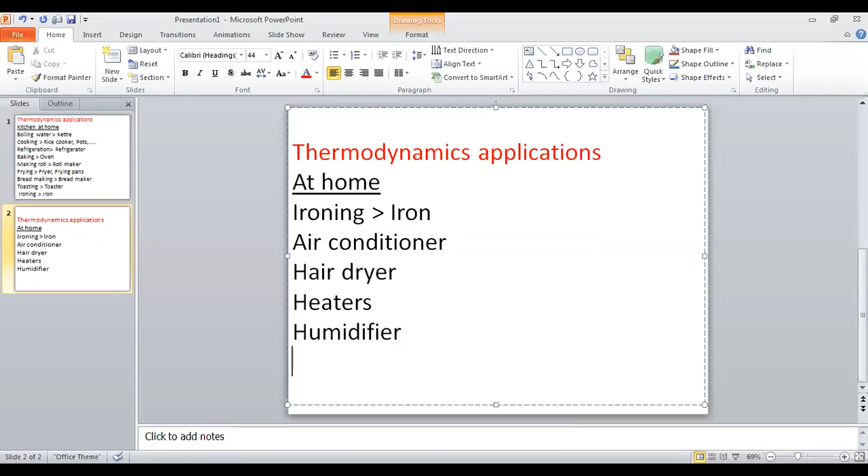If some have valuable artifacts, they keep humidifiers, or some may need to remove the humidity with a dehumidifier. Those can be in houses, but we don't have many because we don't produce them locally.

At least you are going to see hair dryers, heaters, humidifiers. Even in your phone you can see heat generation when you are using it, because digital electronics have processes taking place. Your gadgets, phone, computer, all need cooling. Even your computer's microprocessors have cooling solutions.

Even your LED bulb, CFL bulb, or the normal incandescent bulb generate heat that somehow has to be dissipated. In bulb design, heat transfer is considered very important alongside thermodynamics, and both of these, thermodynamics and heat transfer applications, go together. No heat transfer, no thermodynamics.

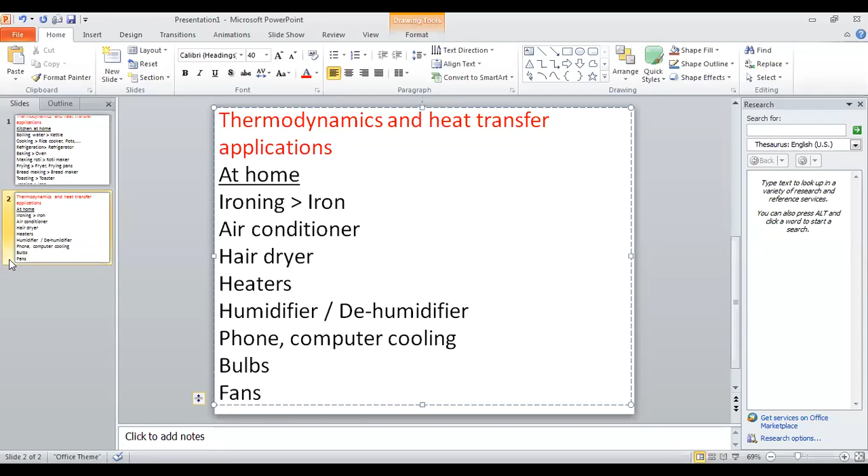Let me duplicate this at home. Let's say even home design - eco solutions, eco designs, natural cooling, designing of glasses, windows, or location of windows and all for natural cooling, then energy efficient eco solutions. So in home designs, eco solutions, designing of windows, the orientation of the house and all - this also needs thermodynamics and heat transfer, natural knowledge.

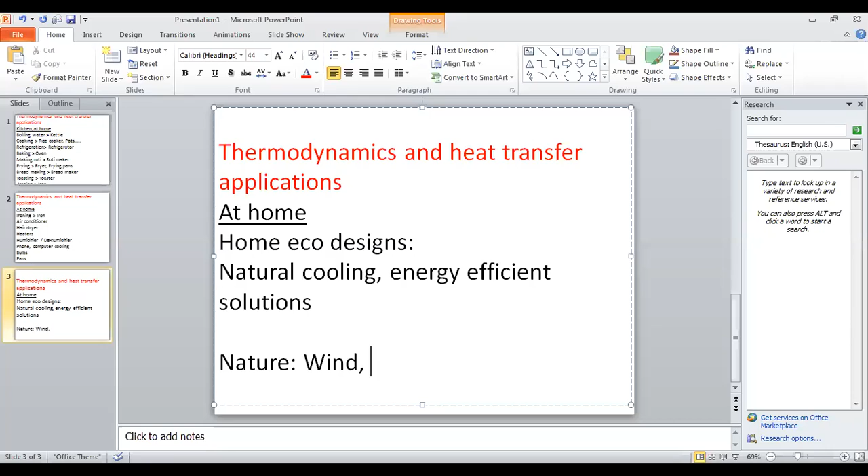Now you can see how important this is. Also other than this, even nature - wind, modeling of wind, the weather - all these things are related to thermodynamics.

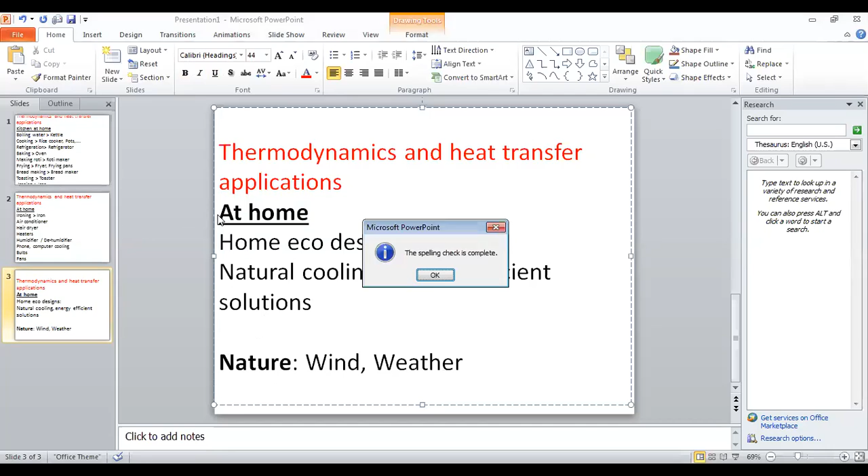Very important. If your natural knowledge is not there with you, do you think you will be smarter without the knowledge of thermodynamics? No, you will not be smarter. It doesn't mean that knowing only thermodynamics makes you smarter, no such thing. But without it, having this thermal scientific knowledge is a necessity. Natural understanding is very essential for everyone, and this is very important for technology students. So today we are discussing the importance.

So your knowledge contributes to home eco designs. You are developing some components, parts - for example, special window designs, louvers, and also natural cooling effects in houses, energy efficient solutions - everything you have to deal with.

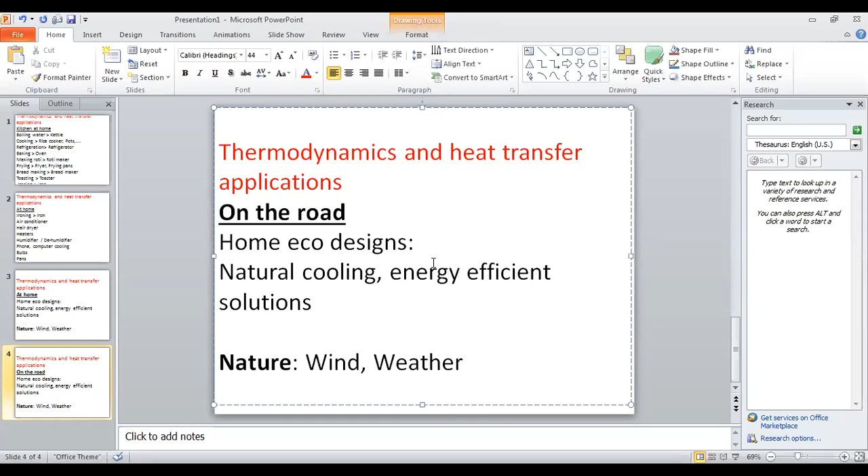Let me continue this. On the road - even when you are running on the road, you will be consuming energy, your body will warm up, and there are some kind of energy interactions. So any science closer to studying this physical exercising or running is thermodynamics and heat transfer. Even simulating blood flows and all, you need thermodynamics, heat transfer, and of course fluid mechanics, and a lot of thermofluid things.

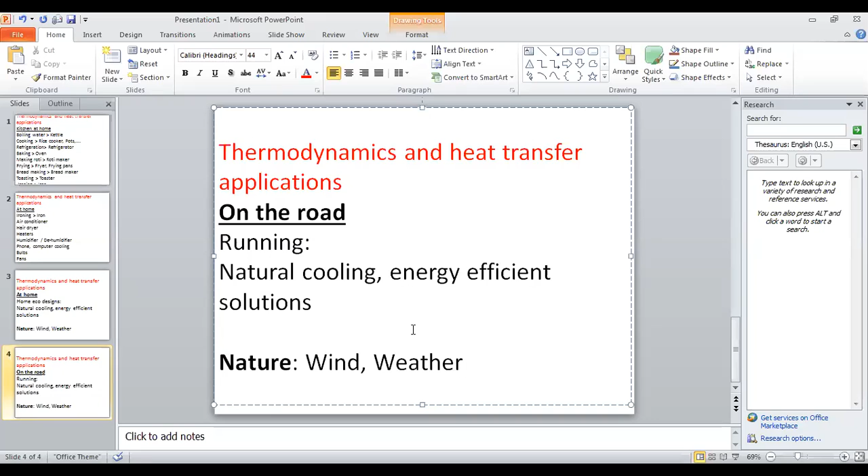Running - how about the motorbike? Everything, including the engine power, engine cooling, even the safety of the petrol tank, the controls, acceleration, and all the controls of the movements are mostly related to thermodynamics.

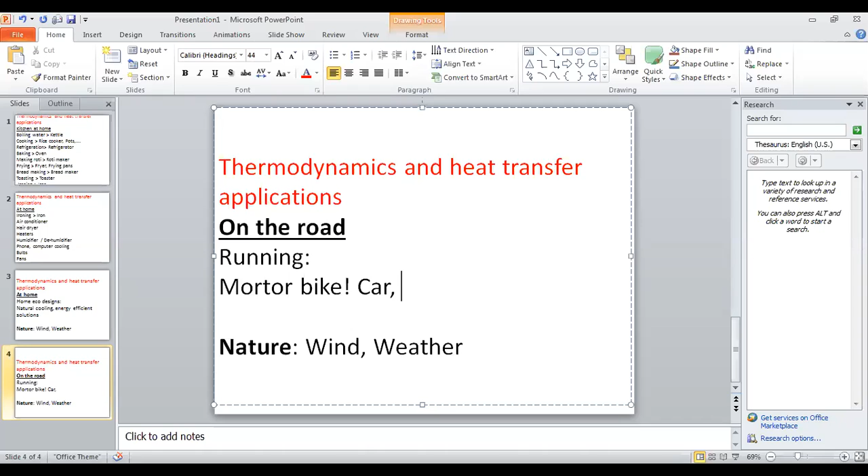Your car, if you have a car - inside comfort, car air conditioning and climate control inside. Then the vehicle running, the engine dynamics, engine cooling, engine reliability - whatever is related to automobile is related to thermodynamics. Without thermodynamics, you cannot develop this.

Let's say Ferrari - Ferrari is a supercar. So they design and develop this not based on theory, but based on experience. That's why if you can do wonderful creations, it is something beyond the books. Sometimes book knowledge is not necessary, but your natural wisdom in understanding thermodynamics without equations is what matters. Ferrari, I just put here.

Then friction control - friction generates heat, and when friction generates heat, that can cause damage; that's one thing. And the other thing is it causes extra energy wastage and all. Friction controls.

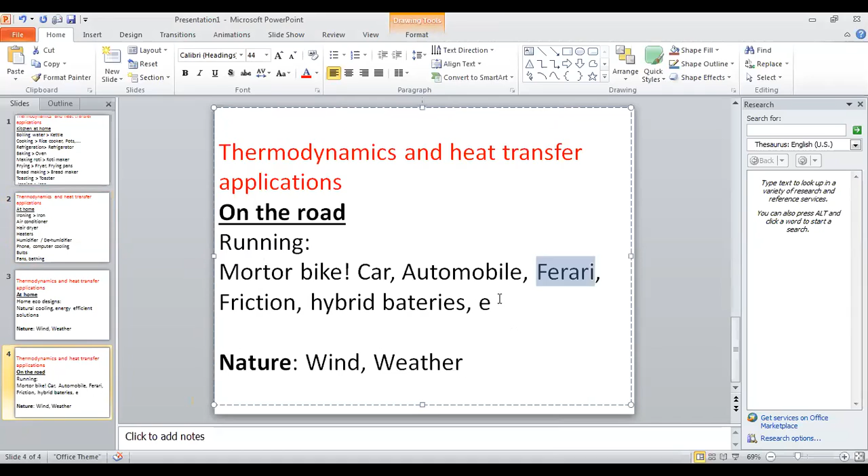Okay, hybrid batteries. On the road, okay, everything. Even emissions - you have the very toxic emissions. So emissions, not to say emissions, but control. This needs some careful controlled combustion and also use of quality fuels, your piston cylinder ignition system, and everything. So that's why it's related to environment as well. So emissions control in vehicles.

Emissions. Emissions means there are a lot of things you have to learn, okay? Emissions, exhaust control, emissions control in vehicles - lot of things. The thermodynamics aspects are the fullest, okay?

On the road, okay. So when it comes to energy, let's say before talking about anything, without understanding of thermodynamics, how can you contribute for this? Not possible, okay, not possible. Your understanding should be very important. That's why your understanding - not the understanding of the textbook - how to relate your knowledge to the applications, how to develop the solutions, that is your goal of learning thermodynamics.

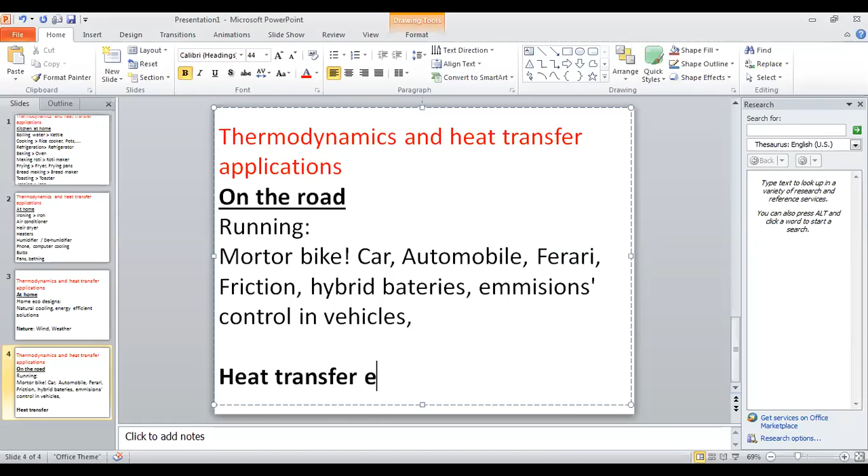Okay, thermodynamics. And you know that there are professions. We have the heat transfer - there are engineers, and there are technologists. Do you know that they are very expensive and very rare? Yes, heat transfer engineers are there. Heat transfer technologists are there.

So they can see what the others can't see. They can see through the nature, so they can understand the nature very well. And they are providing solutions in very innovative ways, and those solutions are really useful to the societies. So why not you can be a heat transfer technologist?

Here are the professions - heat transfer engineers in the petroleum industries, even in the chemical industries, even in automobile industries, even in appliance industry, the kitchen appliances and all I mentioned, and even in nuclear industry, even in nuclear power plants, even in coal power plants, you can see heat transfer engineers. But if those engineers working in coal power plants are not heat transfer engineers, they cannot run the show. That's the issue - every time they break down. So the maintenance, the preventive maintenance, some design improvements are not there because those engineers are not sound in heat transfer and thermodynamics.

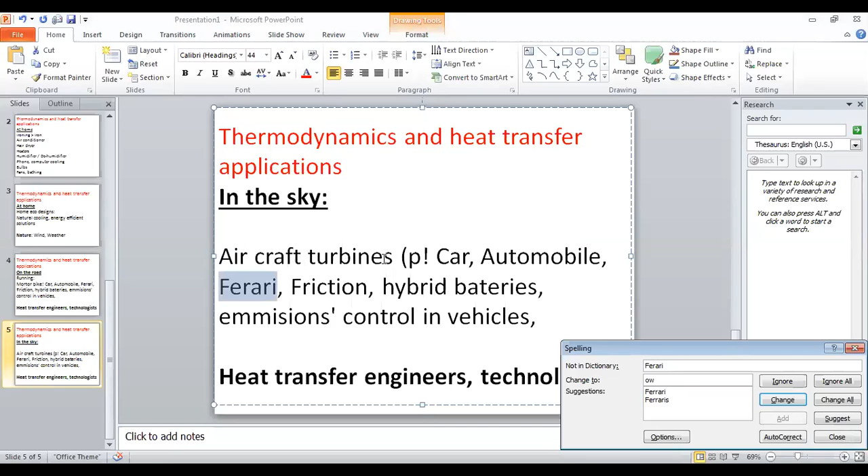In the air, okay, in the air, or in the sky, okay, sky. Aircraft turbines. Turbines. They call this power plants, okay.

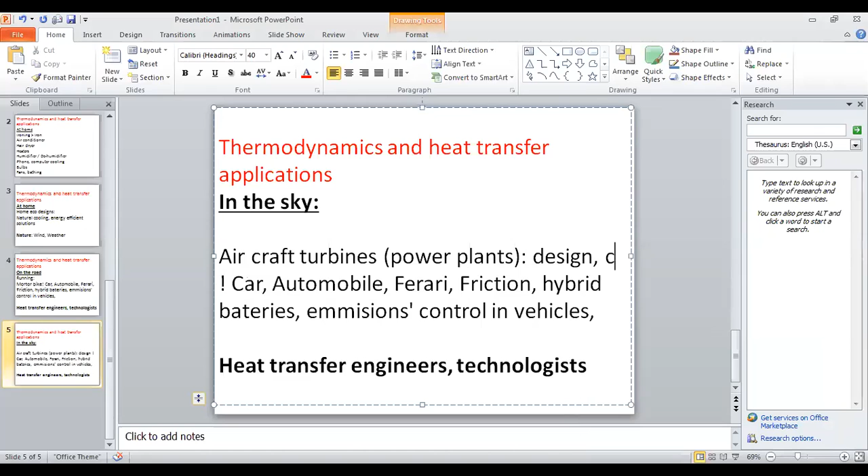Power plants in aircrafts, okay, power plants. It's thermodynamics, aircraft turbines, power plants, even design, construction. Those should be very reliable. You know, this flying is not a joke - construction, testing, maintenance, all very serious jobs, you know, all very serious jobs.

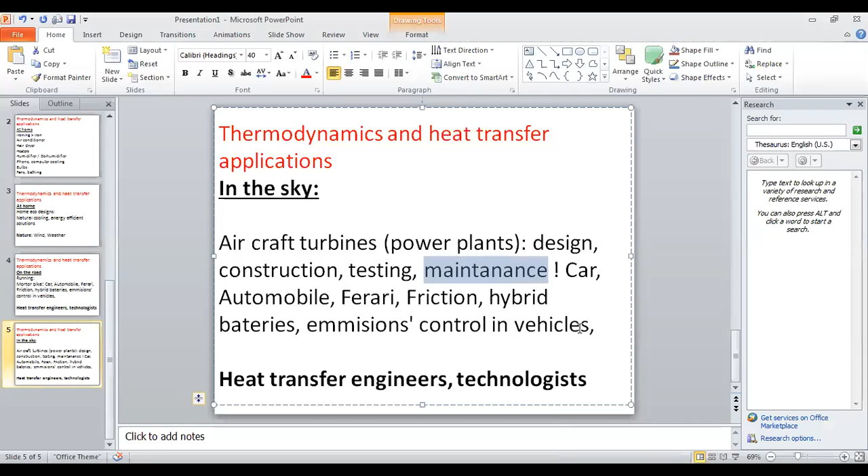Aircraft turbines - yeah, that is only one part. And in the aircrafts, there are air ventilation systems. Okay, today I'm telling you, I'm showing you how important this thermodynamics and heat transfer knowledge is.

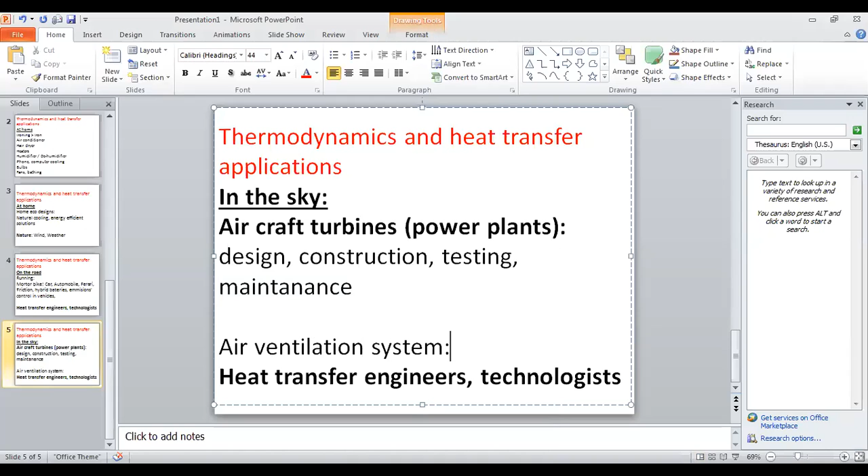Okay, later we will see in the internet the real ones. Air ventilation systems - that is not only the aircraft air conditioning, okay. Not only this, even heating the outer body of the aircraft, okay, heating the wings, heating the wings and the body of the aircraft.

So these are, because if there's no heating of the body of the aircraft, what happens? Do you know ice cream popsicle? In the middle you got one wood stick and then surrounding ice. Same way, if the aircraft is not heated outside, because up in the sky temperature is over -60, below -60 Celsius, once you come down your aircraft will be something like a popsicle.

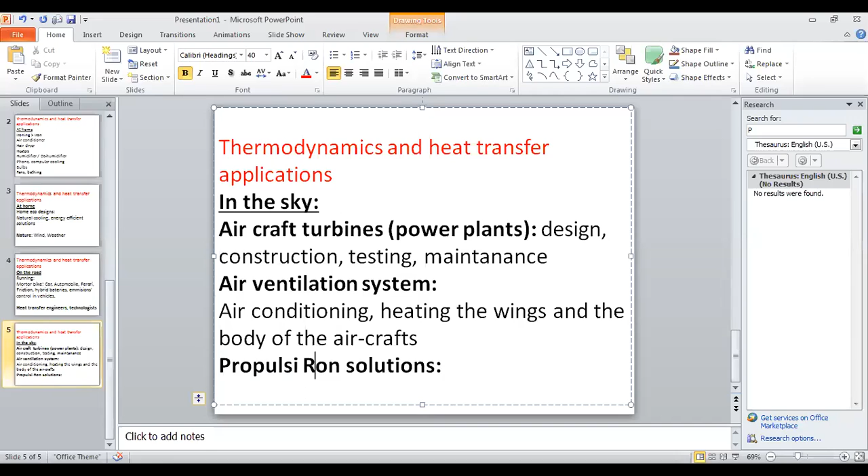Rockets, the propulsion solutions. Propulsion solutions. Rockets, rocket engines, jet engines, even the turbines, all propulsion solutions. Rockets. Jets.

Okay, then the turbines, I put again here - turbines. Sometimes you can see big propellers, it's like fans, propellers.

Later I'm going to share these things: propulsion solutions for Sri Lanka and aircrafts in Sri Lanka. Even maintenance, testing, designs, future designs for power generation or whatever - who's going to do it? Of course, you are going to do it. So that's why this knowledge is extremely valuable, something beyond the books. You have to gain the book knowledge and move beyond it, and be practical. Some knowledge is not in the books.

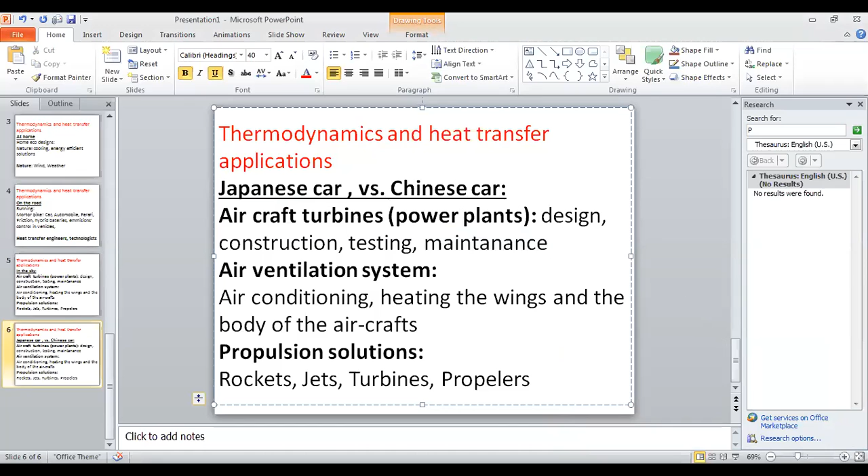How can you comment on this? What can you comment on - Japanese car engines versus Chinese car engines? You know that Japanese engines are quite good in fuel saving. The technology looks similar in appearance, but in actual performance you see a difference - an enormous difference, a big difference. Why? Similar in appearance, but a big difference means Japanese cars are better when it comes to engines and everything. What makes it this way - similar in appearance, but big difference?

Tell me why. This knowledge of thermodynamics is not in the books, and difficult to see and difficult to realize.

Can you understand? That knowledge of thermodynamics regarding vehicles, what the Japanese have, is not in the books and difficult to realize. Even the Chinese may be copying the Japanese, but it's impossible to copy everything. If you need to become somebody knowledgeable in thermodynamics, you should understand beyond the books. This knowledge may not be in the style you see in books - that knowledge may be your own, the way you experience it, the way you see it. Somehow it works, that's it.

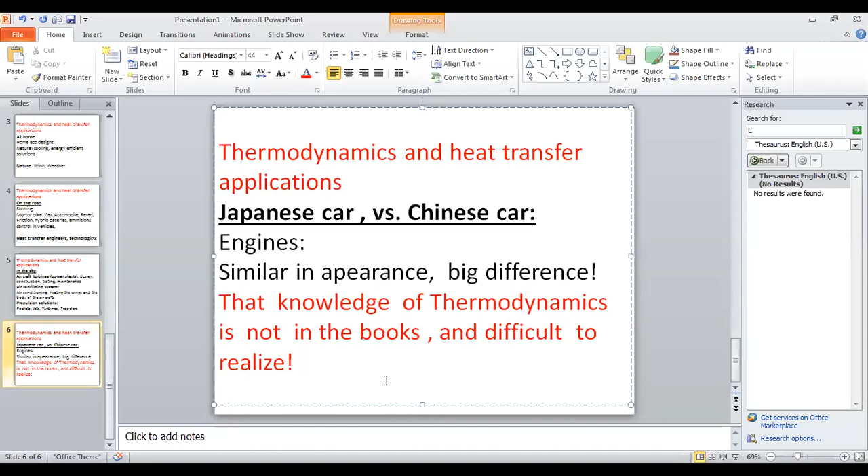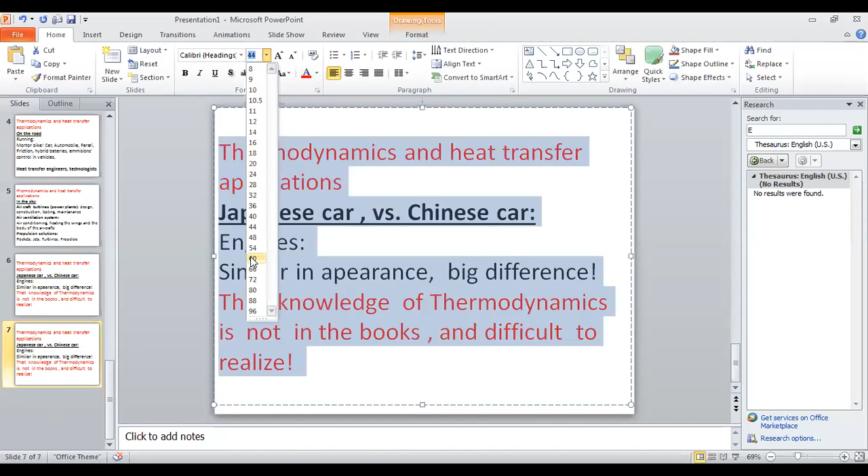This saying is really true. It's a Chinese saying: when the student is ready, the teacher appears. That's what it says. So where is the teacher? The teacher is within you. So this is a fact.

It's not just people in the world like Einstein. Many people in the world, even Sri Lankans, have received the knowledge, sometimes in unbelievable ways, sometimes suddenly they receive the knowledge - Einstein and all. Even you are receiving the same, that's the potential.

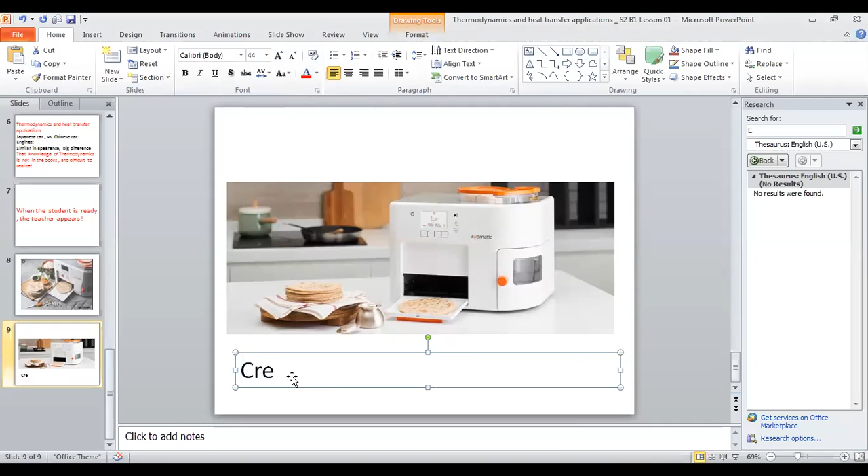Okay, creativity and innovation is extremely important. Creativity and innovation. So when you have this potential - creativity and innovation - this is what is involved.

So for this one, you have to improve your potential. Okay, your potential for this - creativity and innovation, let's see - potential. This is what is most important.

The one who has this potential generally and simply knows thermodynamics. Okay, creativity and innovation potential is very important. This is a very simple example, roti making. Yeah, so innovate this. That's why even in the world they do this kind of things. Yeah, nowadays you can see a lot of other inventions as well - yeah, simple ones. Yeah, example. So why not, you can develop your own one.

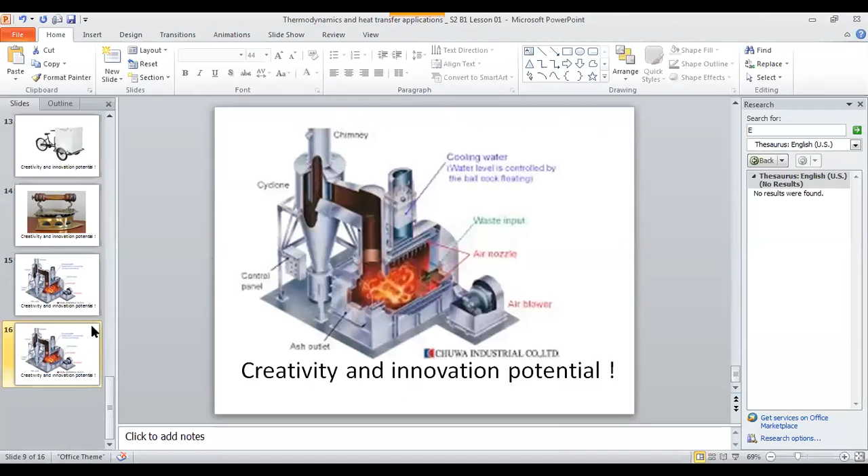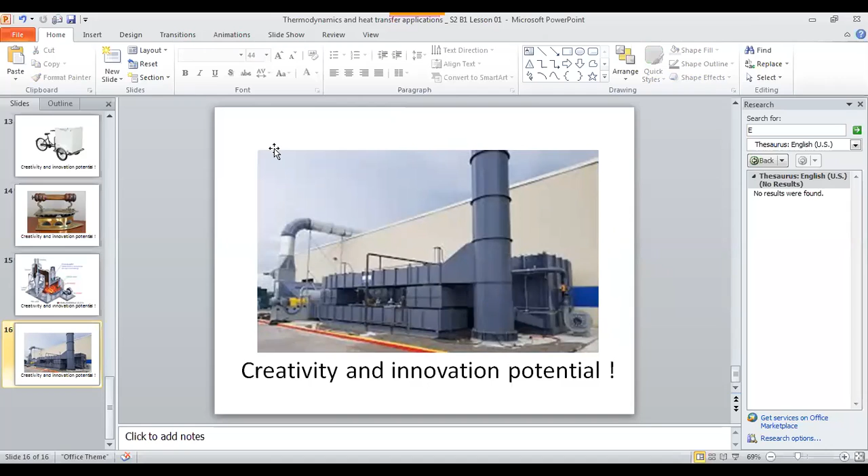Let me show you. This is for the environmental technology solution. This is a huge one, a regenerative thermal oxidizer. So this is for the environmental controls, the protections. They are using this in printing industries, some painting industries, refineries. You can see this kind of big solutions. All are thermodynamics, the industrial applications.

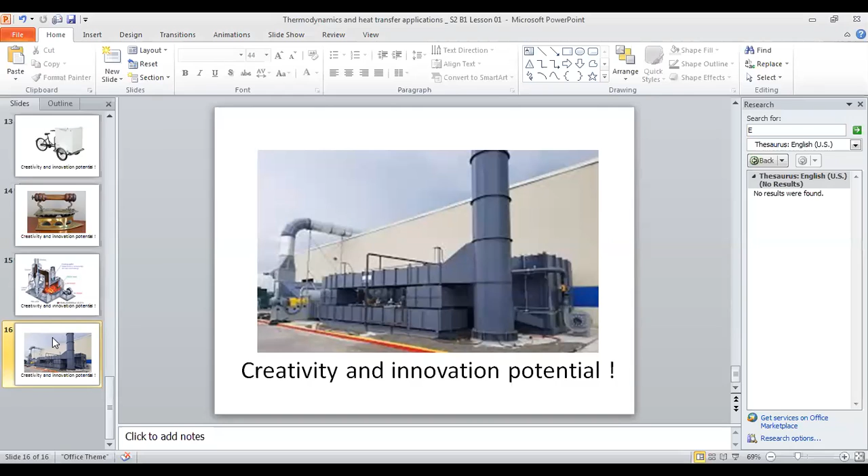Thermodynamics, so you can see how wonderful, how valuable this is. Even power generation, don't think power generation is only electrical, no such thing. Power generation is, let's say, the thermal power generation, thermal power plant. You can see huge thermal power plants. Only the electrical part is the generator, that's all, other things are all thermodynamics. That's why even for mechatronics students, the knowledge about thermodynamics is extremely important. You can see you are going to apply automation on this kind of applications, these thermal power plants.

So why not, we have to develop our own solutions. We have to start our own solutions for the society. This is our target, because if you are developing your own solution for the society, there is a demand. When there is a demand, there is a market. And when there is a market, you are more than surviving. You can create jobs for others, run industries, run enterprises, run businesses and all. It's very nice. Also let me share with you the other areas in thermodynamics.

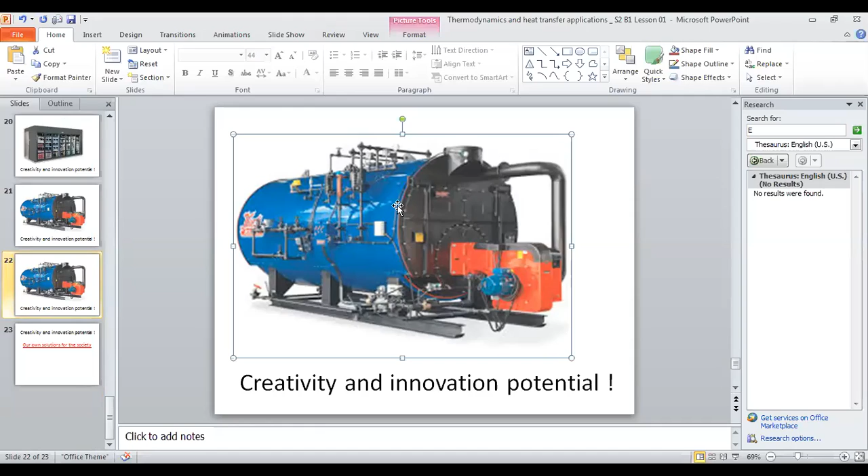These should be your interests. Remember earlier days and even now - from there you can learn the basic phenomena. What's the reason for this? We need burners as well, all related to thermodynamics.

Now, with all these elaborations, you are seeing the opportunities - not the issues, but the opportunities. And remember, knowledge brings the opportunities - the true knowledge, not just book knowledge.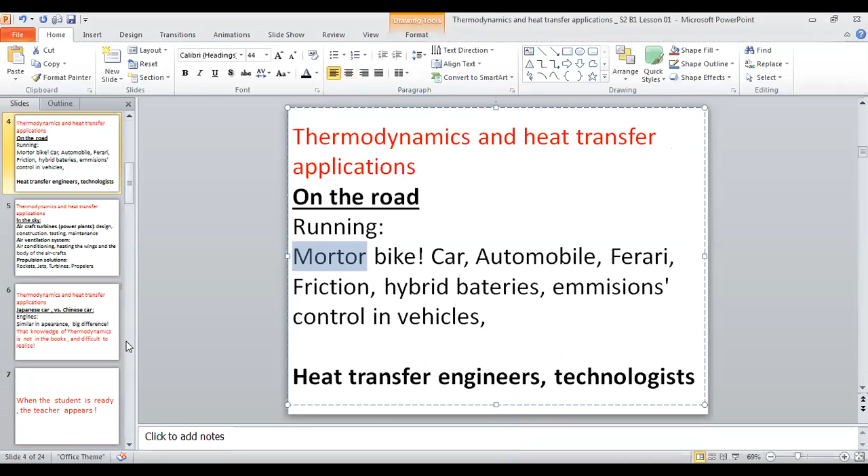So always simple, simple, always simple, always known. And it is easy means step at a time. Step at a time. So this is the approach. So this should be your approach as well in learning, because this is for you. A step at a time. Easy means that one, step at a time, easy means. A step at a time. Okay, so this is our approach, a step at a time.

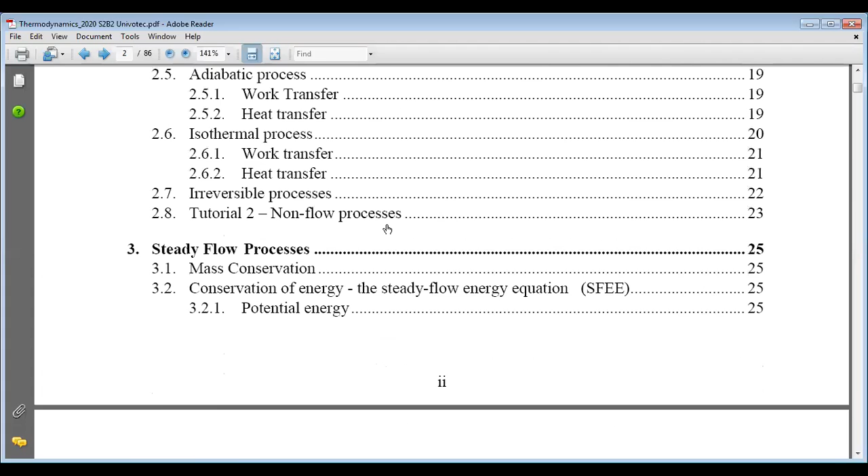Understand? Yeah, that is very important, this way. So if you open up the notes now, let me also open up the notes for you now. Okay. This is your complete note. You have to go through this, the chapter 1. You have to go through this chapter 1.

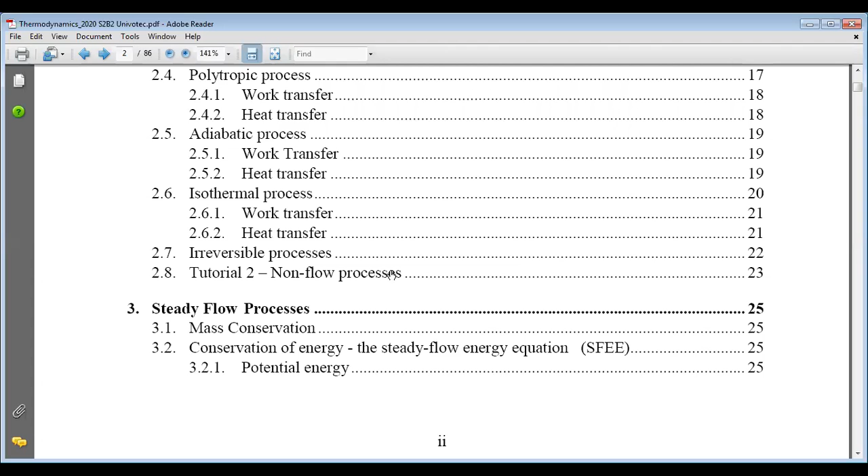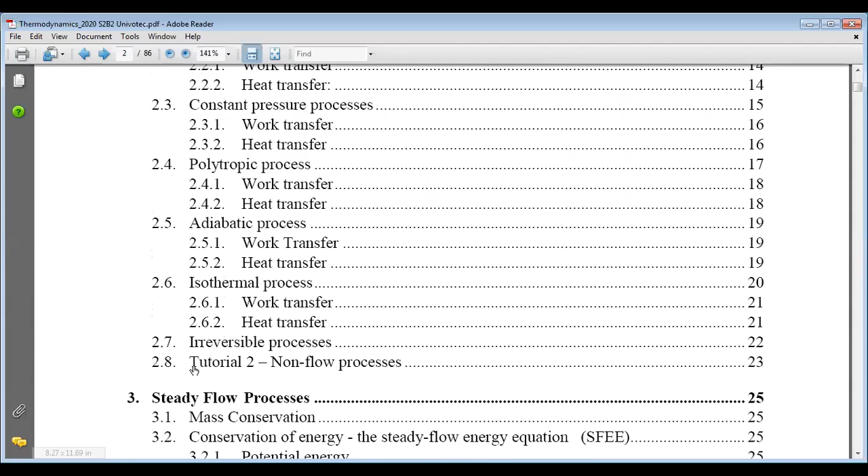Those are in the syllabus as well. Then you have to understand chapter 1, 13 pages. Then you have to go to chapter 2, okay? And you have to learn chapter 3. Chapter 3, there are 3.1, 3.2, and so on, 4 sections. In chapter 2, there are, including the tutorials, 8 sections you see. Chapter 3 is 4 sections, including tutorial about the steady flow energy equations.

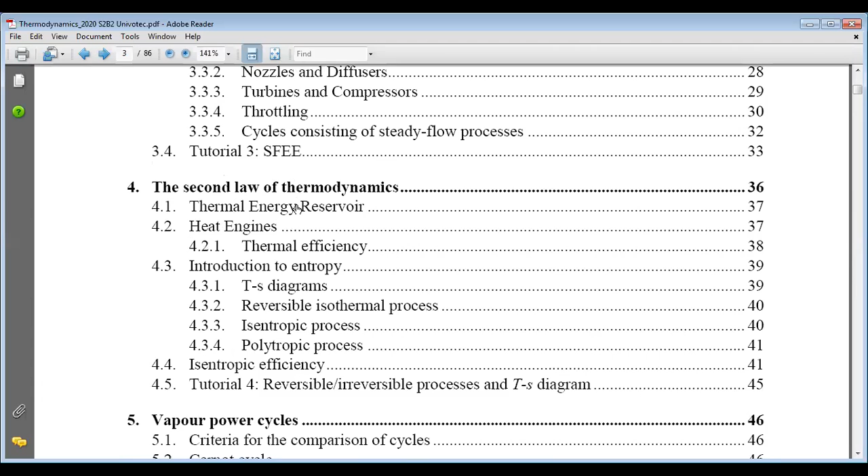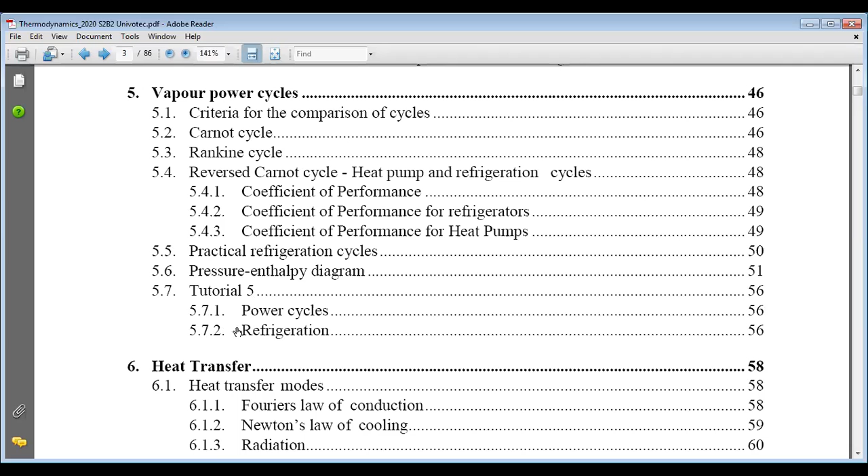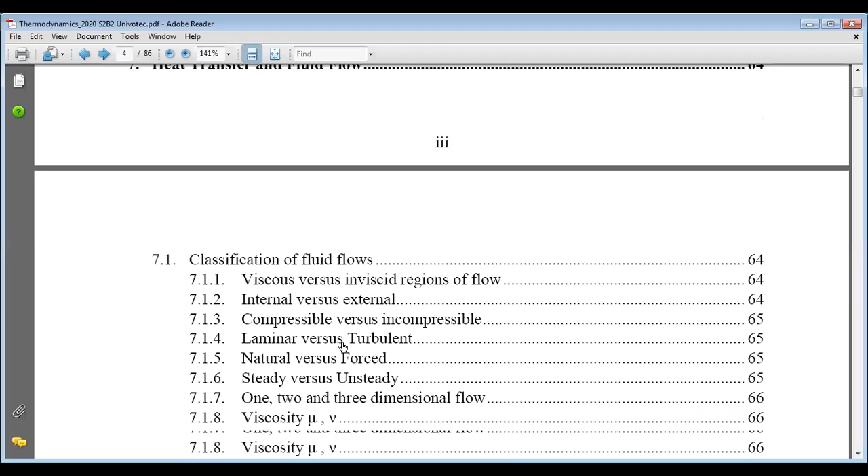Chapter 4 is quite practical again, that's about the second law of thermodynamics. And chapter 5 is about the vapor power cycles. Okay. And 572, you can see page 56, you learn something about refrigeration as well. Okay. And we will see, if we have time, we will continue this, but somehow in applied thermodynamics, you will explore more. Okay. You will explore more.

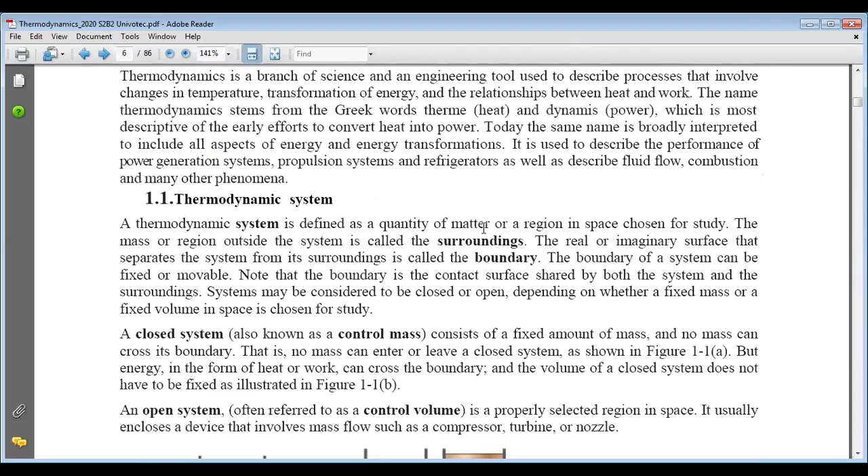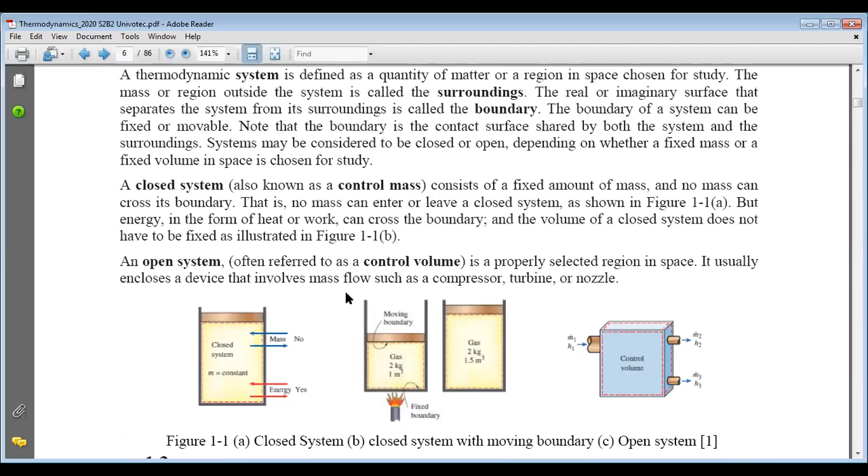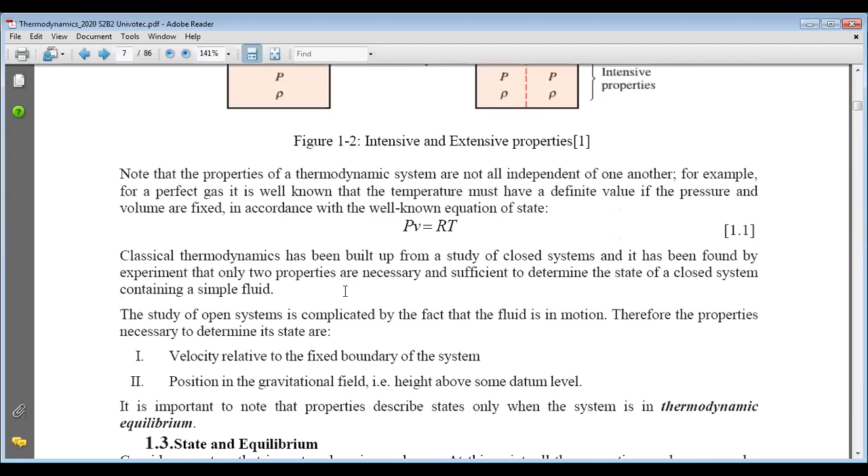So what you need to do is, I'm not 100% going to read this for you in the class. So you go through this in general, you go through it. Try to understand this. Okay? Try to give some practical meanings to this, each and every sentence. Okay? Try to give some practical meaning. Try to understand this. So if you do some careful, very thoughtful receiving of knowledge through this, it will be step by step.

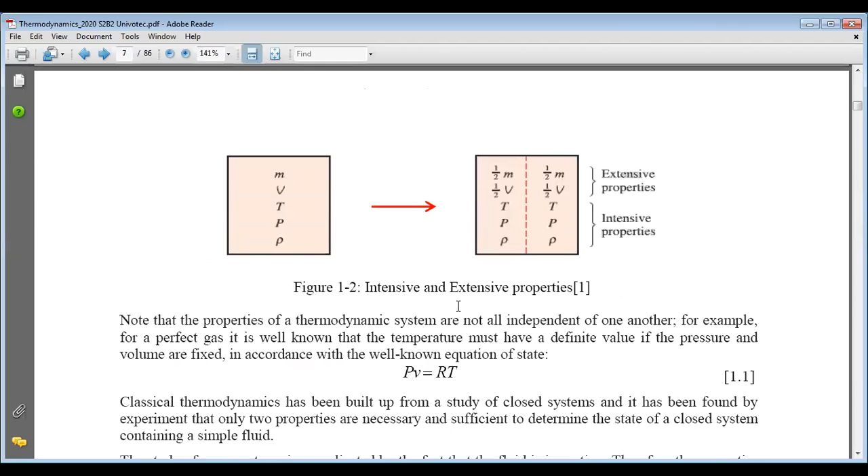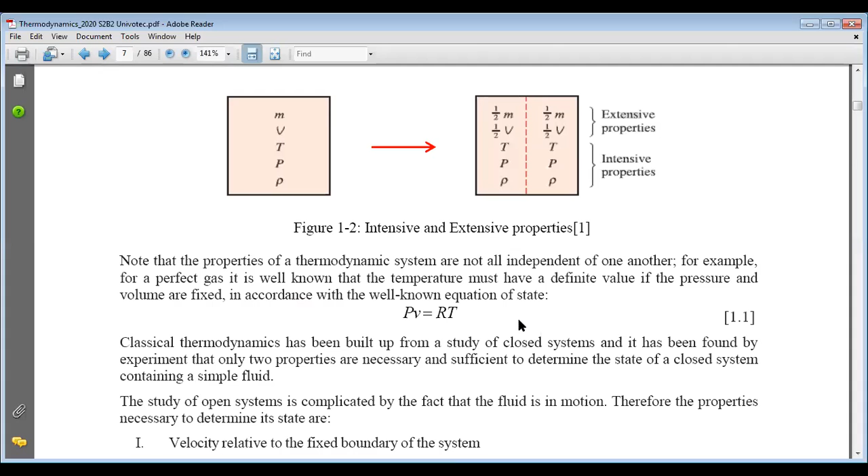Still, it will be simple to complex. That is, of course, nothing complex, because step by step, starting from simple, always simple. And it is always easy. You are learning from known things. You can explore the knowledge, so there won't be any unknowns for you.

So today is starting. I'm going to share some little important things that are not in the books. In Asia, of course, in Japan and China, they are learning these things, but we are not learning these things. So that's why I'm thinking of sharing this one. Probably important for you.

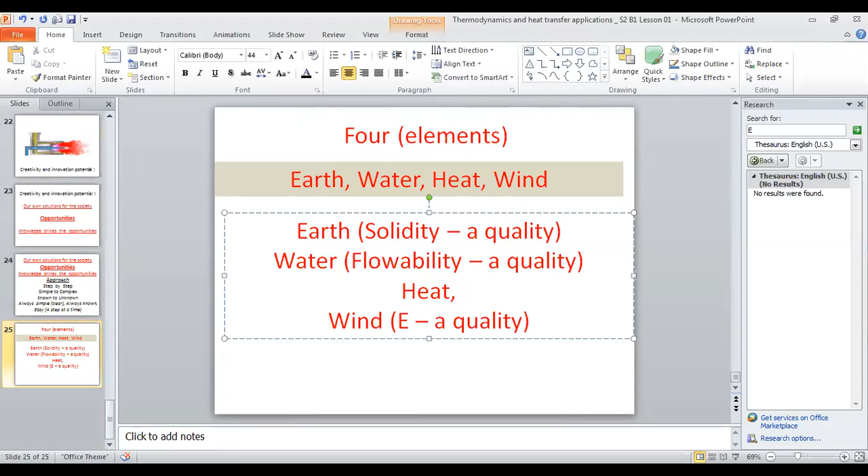Then the heat - before heat, let me explain the wind. Wind means inside our body we feel the wind. Wind means we call it expansion. The simple word is pimbino, which means expansion.

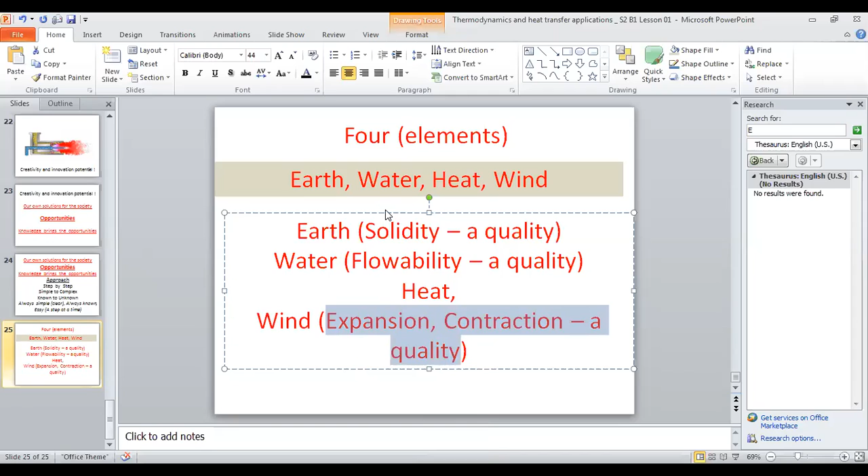And contraction - aquilino. Contraction. Again a quality - expansion, contraction, again a quality.

Earth is solidity - I'm going to prove this. Flowability is what we call water - not just drinking water, but anything that flows. Heat means we call the hot and cold - that is the heat, the energy component. Hot and cold is again a quality, that's the energy component.

Very interesting, I'm going to discuss this. Very simple - let's say air. Air, in the wind, blows because of pressure differences. High pressure means somewhere it contracts, low pressure means somewhere expands - you can see expansion and contraction in the wind even in nature. Even in breathing, when you breathe in, the lungs expand. When you breathe out, lungs contract. So when the lungs expand, air goes in - that's the normal way. When the lungs contract, air goes out - we call it breathe out. So breathing in and out happens because of the lungs' expansion and contraction - we call it the wind quality. So I will take one by one, starting with wind.

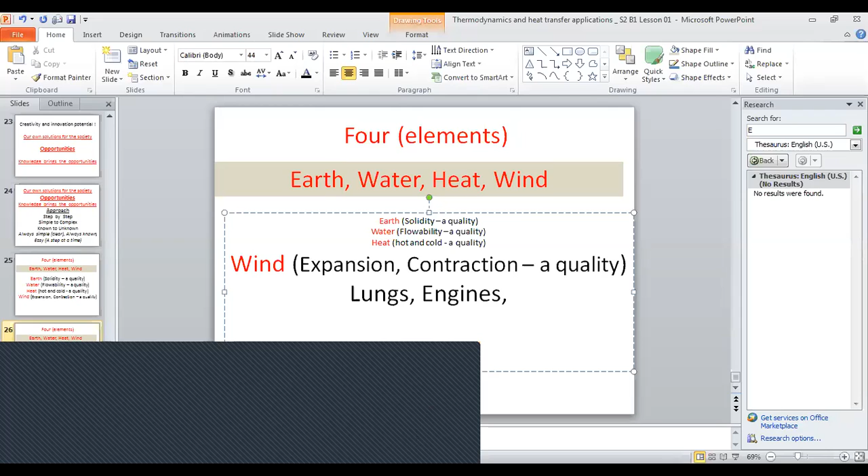Lungs, engines, even wind in weather, nature, wind expands. Even heartbeat and pulse, because of that, somehow the expansion and contraction. So even pumping tire with air, air pumping to tire, pumping to tire, into tire.

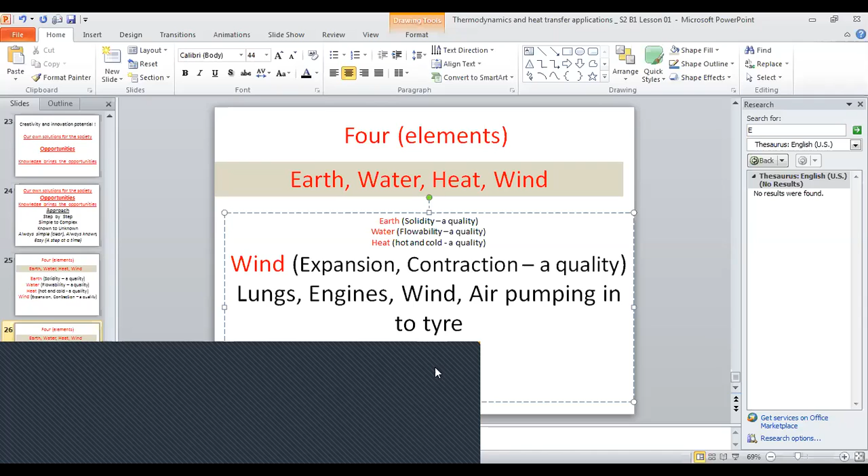This is a very important example: air pumping into tire. TYRE, I think the spelling should be okay. So what happens is, when air pumps into the tire, somehow you can see it's related to expansion and contraction. Let's say after this, the tire becomes... yeah, later I will discuss that.

There can be a lot of examples, even cooking, water boiling, you see inside, once energized, you can see some expansion, the noise, and even escaping molecules or escaping water as steam. So there you will see this expansion and contraction. Even within hot and cold, you see expansion and contraction.

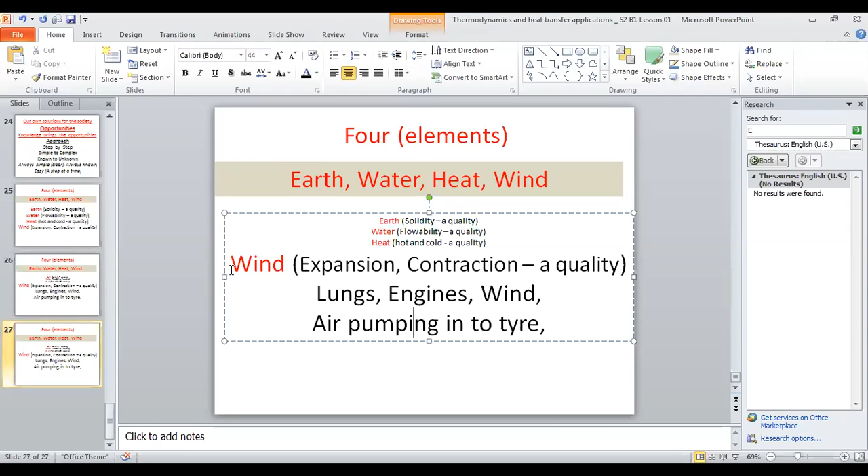So this is up to you to think. Now, let me look into not the wind, but now I will look into water. Now I will look into water.

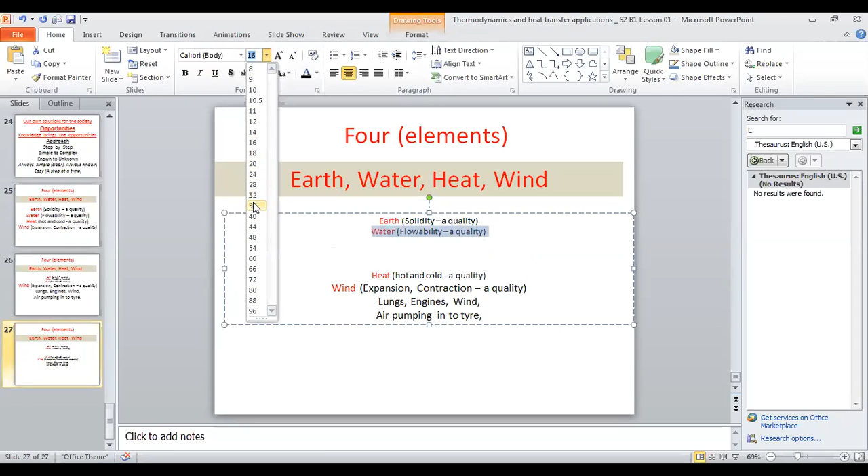Flowability, very interesting. Water, water in the river, it flows. Flowability, the water quality, the water in the river, it is the water in four elements.

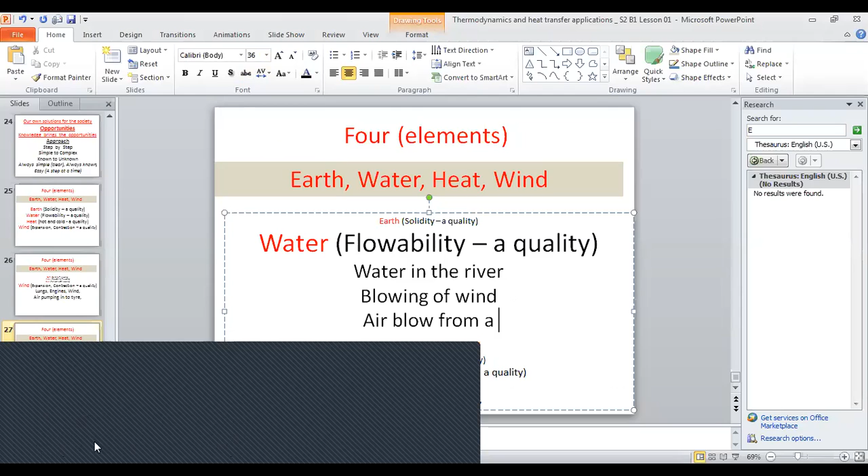Then wind flow, blowing of wind. It's a flow again. Air flow from a fan, see, interesting. Air blow from a fan.

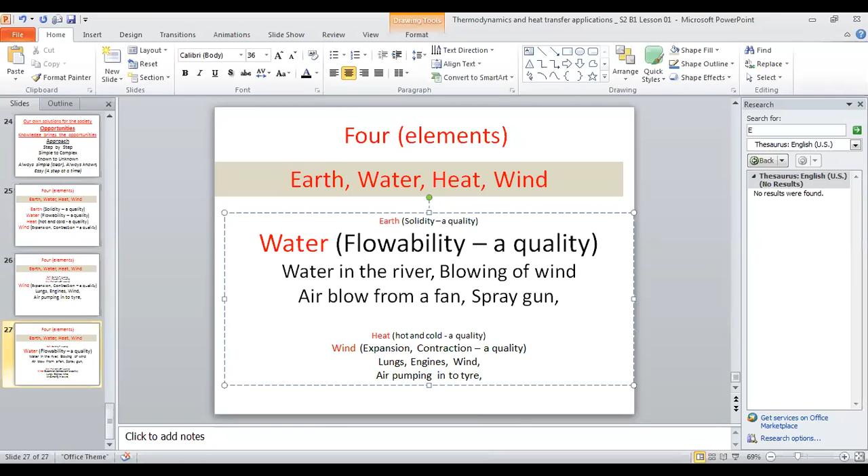Then let's say spray gun, paint or water, whatever, spray gun. See, mechanical devices: spray gun, water in the river, blowing of the wind, air blown from a fan, spray gun, water in a pipe, pipe water. Very interesting. Afterward, you will see some surprising things.

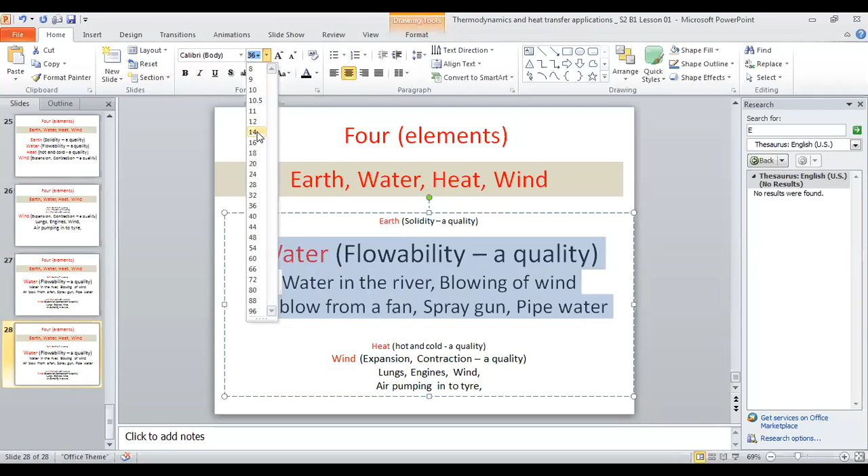After discussing solids, very interesting, water. So you can have a lot of examples. Solid, so I'm going to discuss solid now. Solidity, see whether you agree with this or not.

Water in a glass. Children, speak up, is this solid? Because water in a glass is not flowing. Okay, so let me explain. If you put water in a glass and you smash on the water in the glass, it breaks. Why does the glass break? Because water has some solidity and it can transfer the force to the glass.

Water in a glass is something like it has a solidity. If you smash it, the glass can break. Even sometimes water is used to cut metals. Why? Water can become a very sharp and solid matter. Okay, that's why. So this is a different knowledge you are receiving.

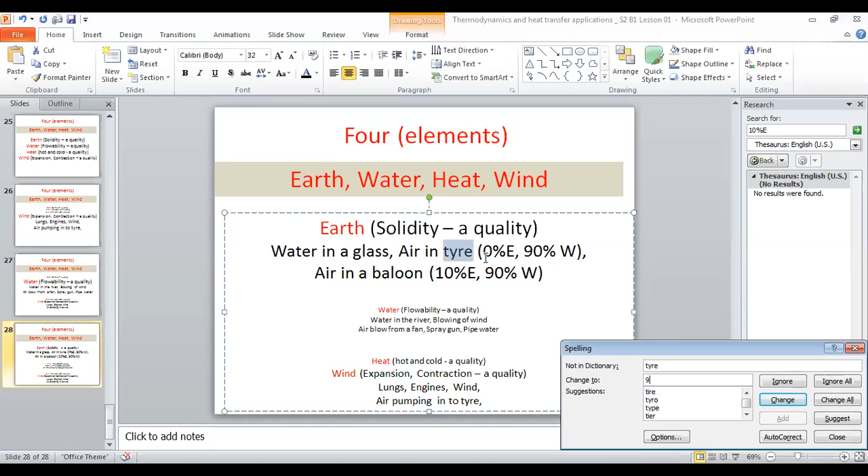Air in a tire is the other way, 90% earth - earth properties there. 10% expansion, contraction.

Water in a glass - no flow at all. So I would say 100% earth, unless you are tilting it to let it flow. Water in a glass, let's say 100%.

Then metal rod. Let's say 98% earth solid. How about the other 2%? Even when this metal gets higher temperatures, it expands. When it gets lower temperatures, it contracts. So let's say 95% earth, 5% wind. Very interesting. Metal.

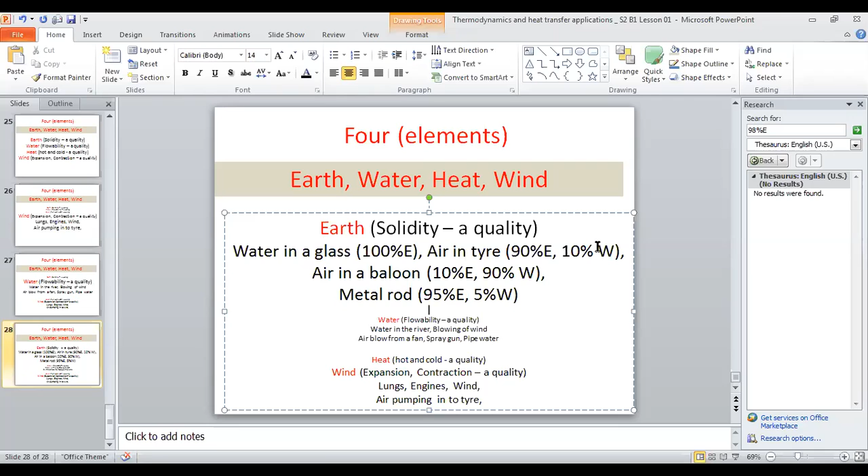Okay, let's say water in a river - water in a river, it flows. So it shows a higher quality of water. In the four elements, water - the definition of water is flowability, expansion and contraction. That's the definition of wind.

So in water, here 10% is the flowability. We have two W's - we have two W's. So air in tire: 90% earth, 10% wind. Air in balloon: maybe 10% earth, 90% wind, expansion and contraction. Metal rod also has 95% earth, 5% wind.

So when it comes to water, even boiling water has the wind quality. Boiling water has expansion quality when the water gets energized. Further energized it becomes steam. We can see that is kind of expansion - separation, the gap between the molecules becomes more and more. So it has certain expansion.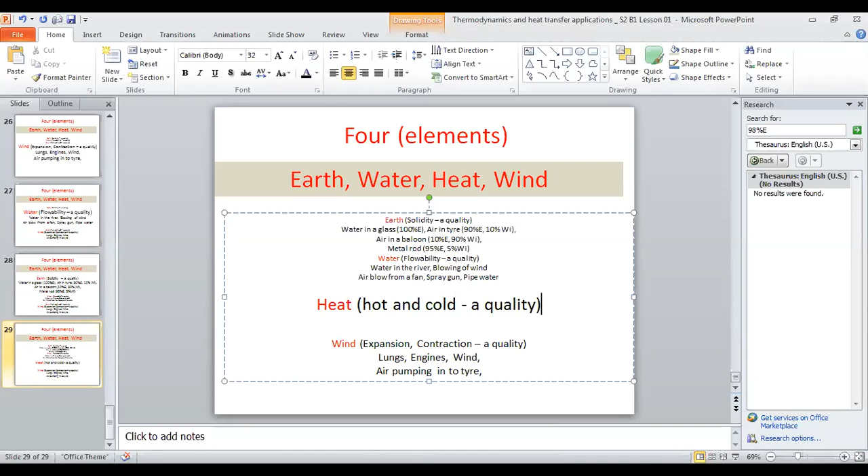Then let me go to the other one, the heat, the last element. So when it comes to heat - for example, boiling. Boiling makes it hot.

So heating and cooling, sometimes can be natural, sometimes can be man-made, sometimes can be industrial processes. Okay, so it makes it hot and cold. So the issue is, when hot and cold interaction is there, the earth quality, the water quality, the wind quality can be changed.

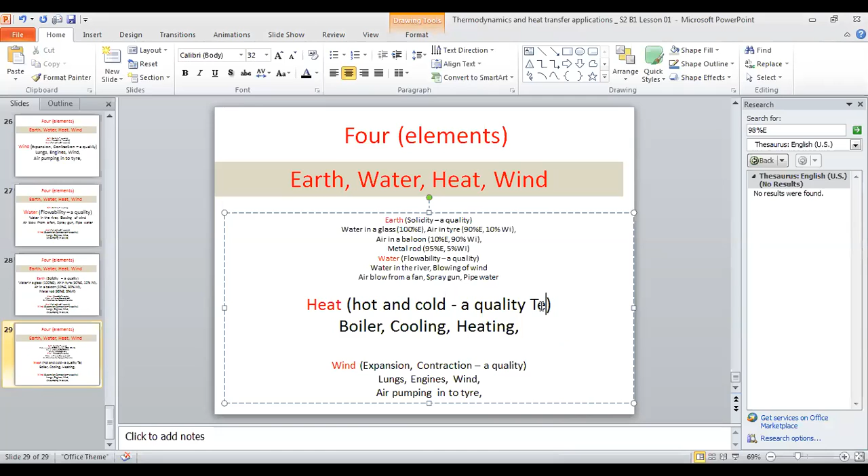Make it hot and cold - that is the molecular vibration related to hot and cold. So this is related to hot and cold quality, and this is related to temperature. That's a part, okay? This is related to temperature as well. Very interesting.

So for this lesson, all the knowledge you are receiving is based on your life experiences, not from book knowledge. Okay, so these 4 elements - think about this, and this is very important in designs. So balancing the quality of these 4 elements is part of the creativity, innovation, and design.

Balancing of the 4 elements in designs - that is very important. Even in a tire design, you have to think of these 4 elements, how the interactions and all. And that is what we call the technology somehow. Later we develop equations or whatever, but basically all have to do with these 4 elements. That's all.

Okay, example, even sharpening a knife to cut things and all, again it's about the intensity of the earthness, the solidity, the intensity there. The flat and the sharpened, the difference - that's how we are improving the intensity of the earthness sometimes. Even water, high pressure water you can use as a tool to cut metals even. So the solidity increases. Sharpness means the further intensifying of the solidity.

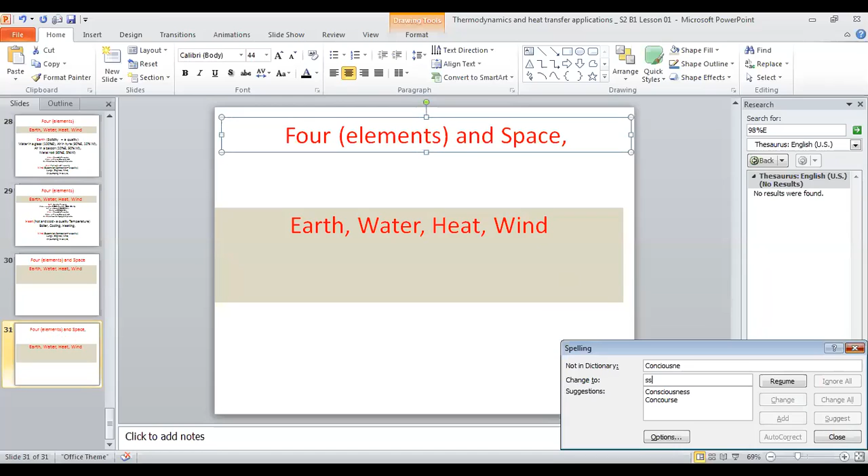These are not just words, these are very, very real. Very real, meaningful ones, going beyond the words or space. Space, four elements, consciousness. So this consciousness is only relevant to humans. That is the extra thing that humans have.

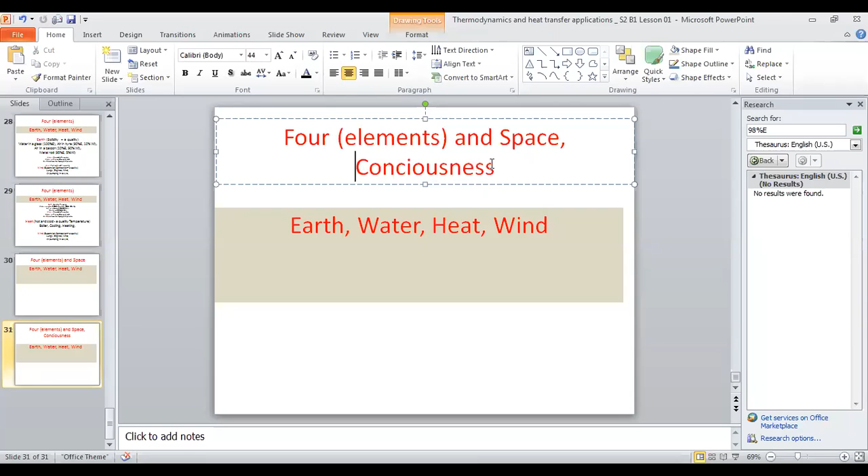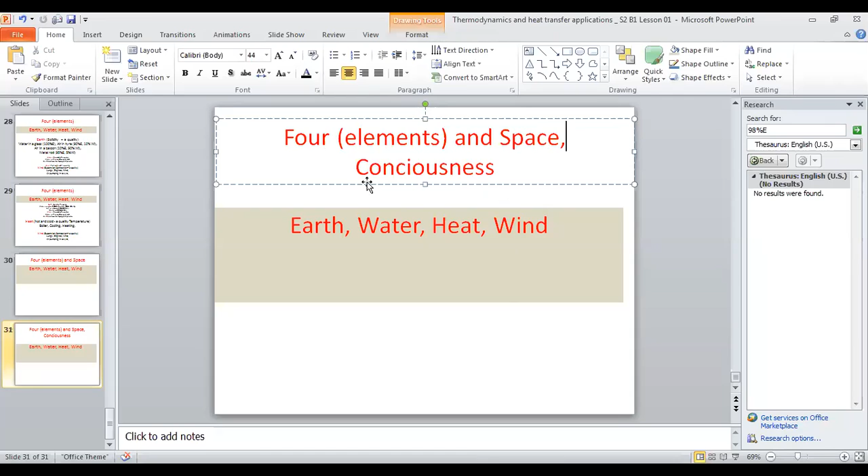Even the intelligence is there—even nature has intelligence, even the trees. They respond to nature and all, but when it comes to consciousness, this is especially for humans. So there can be natural intelligence, what we call in our language, intelligence.

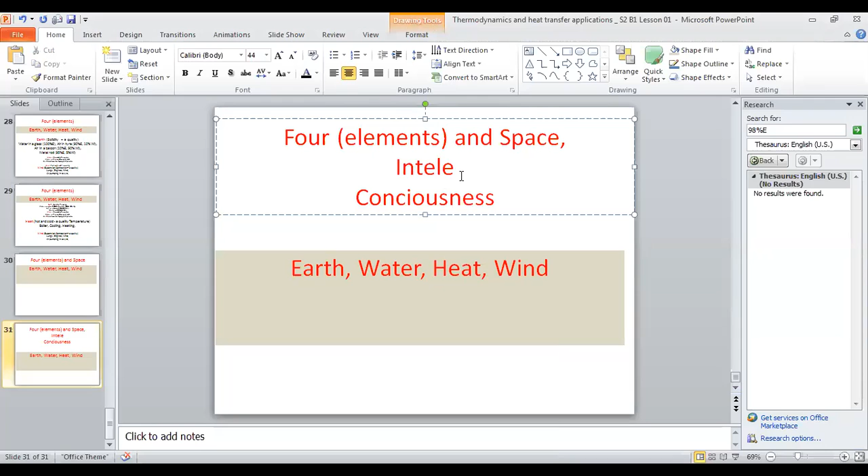Now we have artificial intelligence and all. So intelligence—you can use intelligence, we can use intelligence.

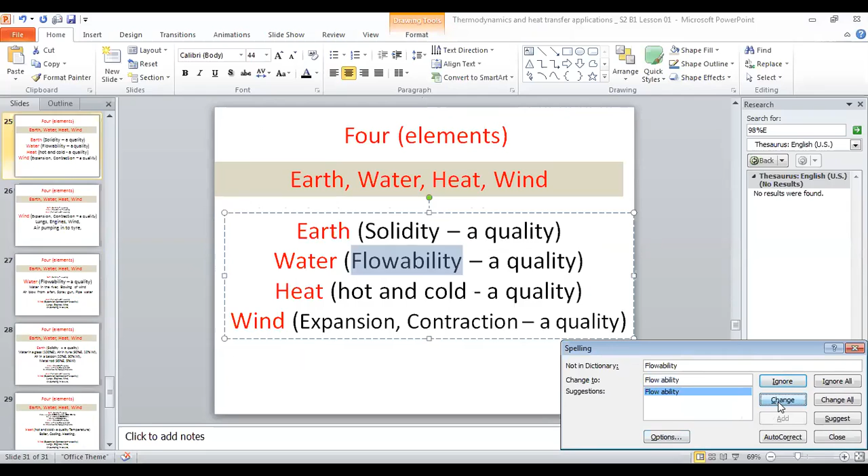So those are the things. But here we are talking about using our intelligence and consciousness. So you also have to be aware of everything.

Somehow we are on this earth, so we have purposes. So when we are learning, we have to learn things very naturally. That is why now we have artificial intelligence. Anyway, all of that learns from our own intelligence and from consciousness. But no one talks about artificial consciousness—that is not possible. We are talking about artificial intelligence only.

But nature has a consciousness. That's why even the corona came—nature has a very strong consciousness. Some call it different words, but consciousness is there for nature.

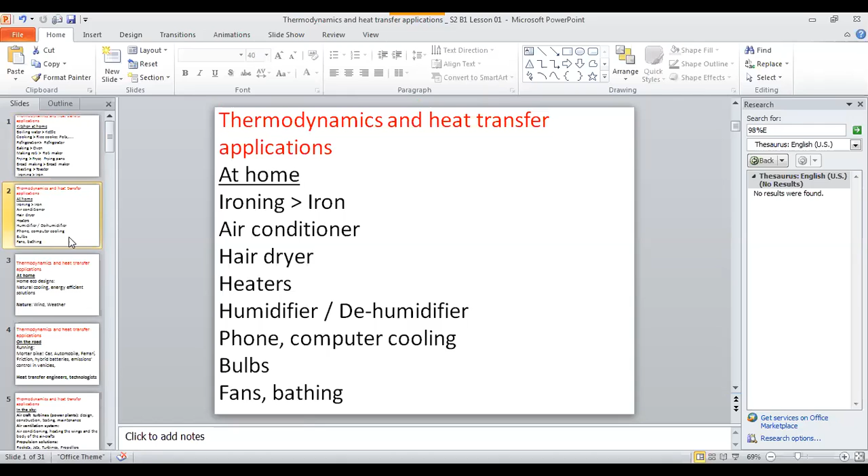Slide 1, slide 2, slide 3, slide 4, slide 5, slide 6—see, unnoticed knowledge, so you are looking for those things. Now slide 7, those are the cream of the knowledge, the lessons of today.

So innovations, we talk about this, and then modernizing the things, and the importance of thermodynamics and the learning approach. After that, see, I have started from the known—this is what you really know. You know the solidity, you know the flowability, you know hot and cold, you know expansion and contraction.

Do you know that the real understanding or real feeling of expansion is not just this word? It is real. When you feel your breath, you feel, oh, expansion is real. When you look into the vehicle, the piston cylinder movement, you know expansion is real, contraction is real. So as I mentioned, this knowledge sharing has started from known things—real known things, truly known things. And if you have issues here, you better get clarified yourself.

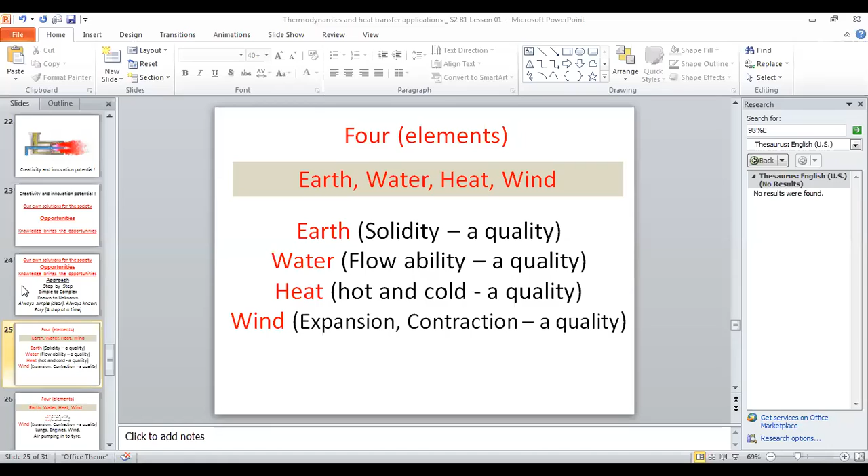Okay, plus the space. So very good for today. I expect you to do the designs in the future for all your kitchen appliances and all the thermal solutions. That's all. So let me stop the class now.